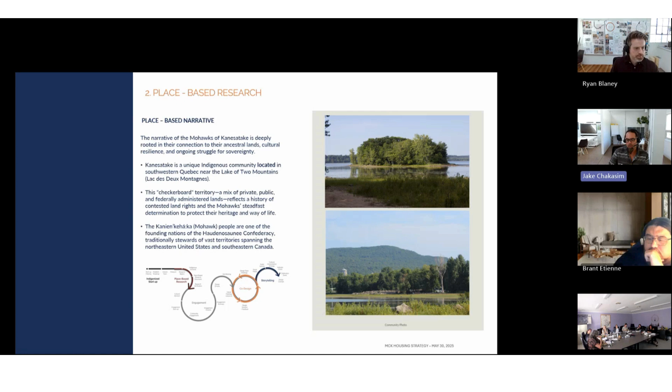So there's a lot of ingredients at play here that we want to consider and take our time with, and make sure that at the end of the day we present a project that is very meaningful to the community at the same time.

One of the questions that came up earlier on is how are we going to represent this project based on a Haudenosaunee longhouse? These are things we're going to be looking at - passive strategies, considerate of the role that wood plays and helps. Wood tends to offer a lot of health and well-being benefits to community, just the sensory environment that wood offers.

So we're really very much aware of the interior finishes, what this building might look like or feel like, whether or not there's a lot of stone, what's the role of stone in terms of foundations. We know it's part of our ceremonial aspect when we do sweats, etc. But it'll be interesting to hear more about how we can actually play with the material palette of the home.

So we're really considering everything from knowledge, wood, practices, ceremony, the notion of a greenhouse. Haudenosaunee is very much an agricultural community culture. So we have a lot of things to pull at the same time.

So we're really taking our time in terms of sifting through the information. Again, traditional practices, we understand the Three Sisters, very artisan-based culture, hunting, fishing, medicinal plants, shifting knowledge, the whole notion of indigenous knowledge and how that is transforming because of climate change. Again, going all the way back to your first document in terms of how you think of climate resiliency.

So the housing response is going to try to take as many factors as we can and try to build on some of the cultural foundations already in place, and then move forward from there, and hopefully come away with maybe a couple of different concepts that are really going to resonate with the housing committee and the community as we move forward.

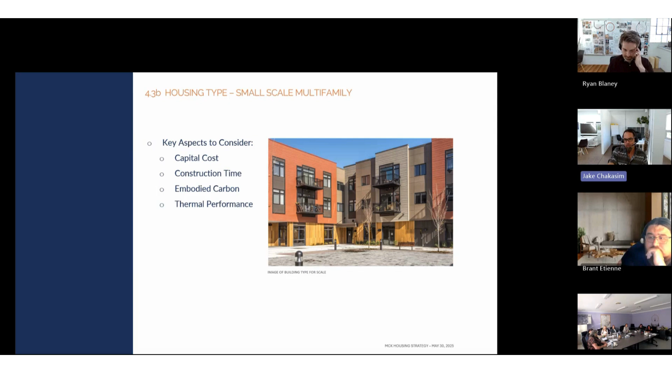Then you have your traditional small-scale multifamily platform housing, 2 to 3 stories. Again, very standard construction, traditional platform, wood materials to choose at, plenty of materials, plenty of opportunity to replace windows, doors, building envelope, facade treatment, HVAC system, etc. So this stuff kind of gives you a sense of adaptability and to make modifications as you move throughout the life cycle of the facility.

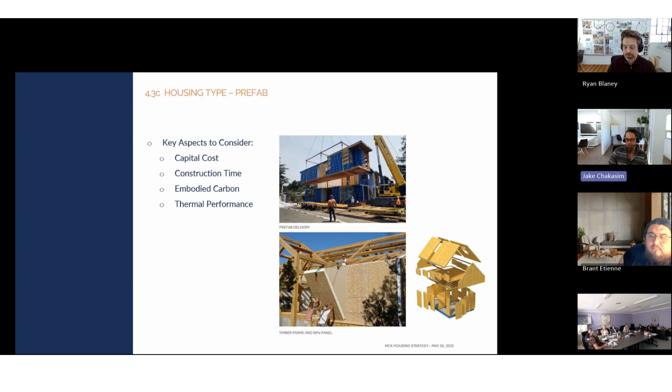Another one that we looked at last week, we shared with the community, was an idea of a prefab house. Again, this would be another type of hybrid construction. For most of us who do know a bit about prefab construction, it's made in a facility, or if it's SIP panel, a lot of the stuff comes down to quality assurance, tight envelope conditions built in a factory where the conditions are good, the working conditions are good. You got a very skilled labor force already at play, so there are not a lot of mistakes in the process. A lot of it is just site preparation, ensuring that you have the right foundation in place, and then you drag and drop, right? And so there's many plentiful benefits to this type of construction.

Another one was hempcrete that we looked at. Again, this is going to be another hybrid construction, in terms of what it offers. It is somewhere along the lines of rammed earth in terms of its environmental performance and the light footprint that it offers, the embodied energy that goes into it, the recyclable energy, the efficiency. There's not a lot of toxic materials that come out of this. It could last for 100 years, but there is going to be maintenance and upkeep. You still have to go out and maintain the building envelope in some form, whether it's plaster or whether it has sheetrock over top of it, whether it has plywood and has vinyl siding over top of it. It's more so the performance value of the building itself, right? But it does offer an idea that you are working with a natural environment and you're trying to look at an alternative building method at the same time.

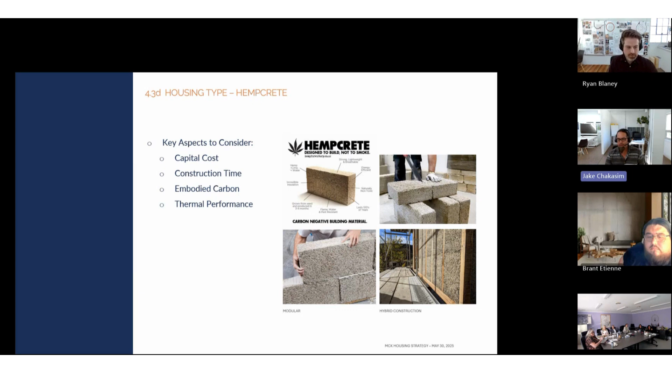In consideration of what the community is looking at, we did listen. We are aware about affordability. That's going to be a process I believe the community is going to have to determine in terms of who's going to move into the residence, and what kind of structure you're going to have set up for the community to move forward. I think we're all in agreement in terms of the durability and maintenance. We want to deliver the best bang for your buck, in terms of what's out there. And based on what you see in front of us right now, you can say each one of these methods are tried and true. They are both beneficial, but each of them have different pros and cons, right? So we're going to share a bit of that afterwards too. And again, coming down to quality control and delivery time, I think that's very important. Whether it's a pilot project or whether it's a prefab construction, which is, you already have a very skilled workforce in place.

The pilot project, I get it. You want to build capacity for the community. You want to work towards Red Seal. You want to build a new skill set in the community. But then you ask yourself, how far can that skill set reach into something, whether it's a new technology like CLT or whether it's basic traditional platform housing, right?

It seems to be a proven method to go with. I think every community across the country is still building traditional platform construction, just because of the efficiency and the simplicity of it.

And obviously with capacity building, we're considering and listening to what the community has to say about skill development. But at the same time, we're hoping the community will think about leveraging local and community resources. So what's at play? What kind of prefab opportunities are within your community, within say a 100-mile radius? That's really going to bring home the capital cost of your project to get it off the ground. So there's a lot of things we have to consider.

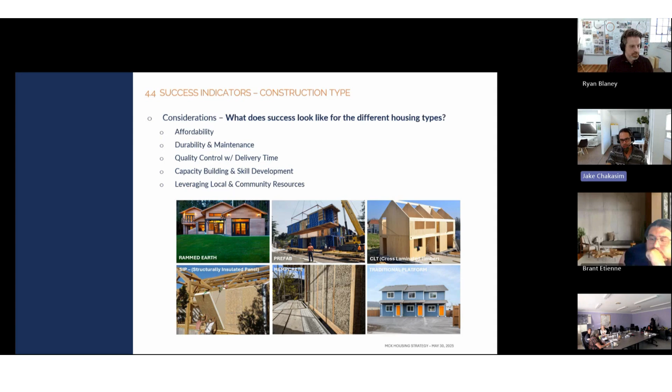And again, it's going to come down to the typology and the construction methods, and those 4 aspects that we want to look at as building criteria, performance values that go into a facility. That's going to be really important.

So part of our process right now, in terms of looking at the 6 different forms, we've done some preliminary research in terms of capital cost, from low to high, and some notes that come with each one of these different types of platforms.

I'm hoping the housing committee will step back and take a look at the 6 different options you have in front of you, and you weigh the pros and cons of each one of these types that you might want to look at.

When you think about the upfront capital costs, we'll break this down as we move forward through the feasibility study. But what we can say right now, based on preliminary research, is that traditional platform housing is the lowest capital cost level. It's the most common and cost-effective building method right now. The mature labor market and supply chain is there, and it's highly optimized for speed and budget. So you see the low capital cost.

Number 2 is prefab housing, which is low to moderate. Savings come from factory-built efficiency, quality control, and low labor cost because you've already got a skilled labor force in play. You get quick assembly, and upfront design expenses are already taken care of. So with prefab housing, site preparation and positioning is another thing to consider.

Then you've got structurally insulated panels, which is a hybrid system. I'd say even prefab is a type of hybrid system too, when you think about the foundation you might have to design for. SIP panels are more moderate, a bit more expensive, but fast assembly — that's what's really nice about them. They reduce labor cost and improve thermal performance. That's what SIP panels are all about — the performance value of the building envelope.

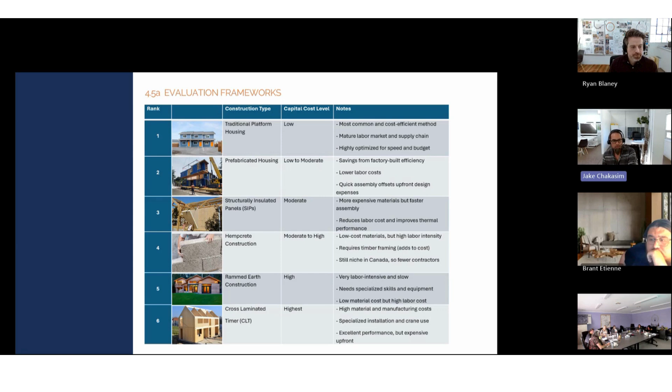So these are the capital cost breakdowns of the six typologies you're looking at. It's something to consider as you move forward with the evaluation process in terms of where the community wants to go. Once we complete our feasibility study, we'll have more information to round out this conversation. I wanted to give you an evaluation framework this evening in terms of what our research has concluded, and where each type of construction stands in relation to each other: capital cost, construction time, embodied carbon, and thermal performance.

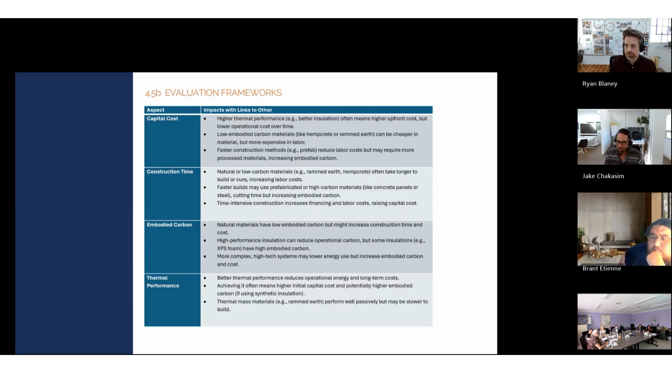So finally, Jake, can I ask you a question? Did you consider the cost of transport, for example, for prefabricated housing, in the cost? At this point, no, these are just some of the high points we're looking at. It depends—if you were to pick a prefab within, say, 100 miles of Montreal, we would research the prefabricated facilities within your region. It's one thing to buy in Ontario versus Quebec or even New Brunswick. These are things that will come into play as we continue the feasibility study, and we'll hopefully approximate this based on the final design outcome, whether it's a 1, 2, or 3 bedroom facility. So these are costs that will come into play as we move forward.

So that was the evaluation framework, really pushing forward the aspects of capital cost and thermal performance. Capital cost level—again, this is the ranking in terms of what's going on. I wanted to reinforce some of the stuff that goes in there. This is pretty much the previous slide I went through earlier, showing low to moderate capital cost levels.

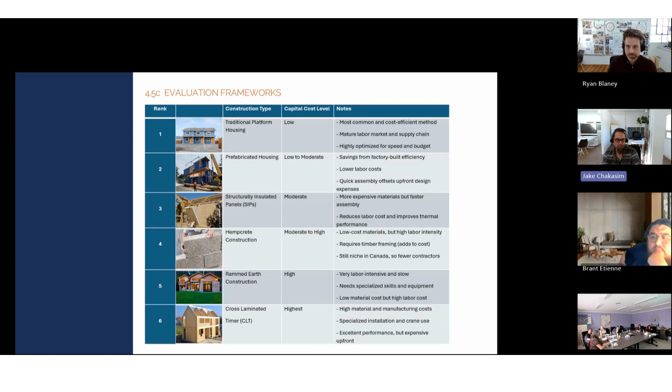Can I ask about the prefab? If we do prefabricated, can we not do that in the community? I know we don't have the place right now, but let's say we have our school or shop here—if we ever get that building, can we not bring that here instead of looking in Ontario? Isn't that your plan anyway?

In order to create or build a manufacturer that prefabricates, you're talking about a lot of machinery, and it's very expensive, because these things come in sections as they're built. Yeah, I know how it works—we just assemble it.

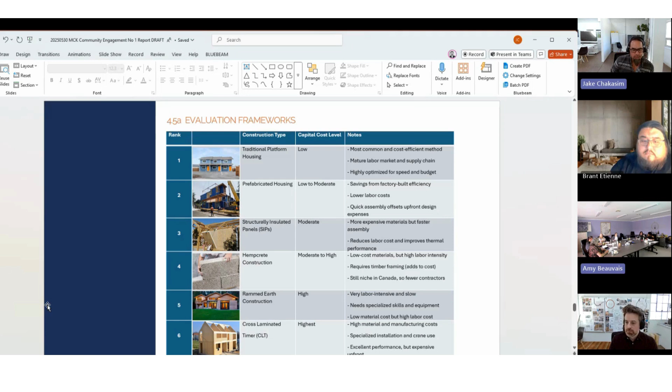That's it—yeah, so again, we're just painting a picture tonight. We're showing you six different options, and for the most part, aside from number one, which is a standard method of construction, the other five are hybrid types of construction. So they will require some aspect of built foundation design. It depends on what the community wants to do—if you're looking for quality assurance and a good product, prefab seems very favorable these days. But if you're trying to build skill, which is very basic in the community, and you're working towards red seal certification, obviously you'd go with your traditional platform.

Ryan, is there anything you'd want to contribute, just for understanding? I think Corinne raised some good points about location and shipping, and these are just, as Jake said, a high-level look at general approaches to these construction types. As we go forward in the feasibility study and gather more information, we'll be able to hone in a little tighter on what capital costs look like, or other considerations from the community that may start to rank these systems in a different order.

The ranking you see here is just a quick environmental scan in terms of how the industry looks at these typologies. CLT has been around for a number of years now, and platform housing has been around forever. Everything else in between has come in within the last 25, 30 years.

So we're looking at all the options, but also really trying to make sure that the product you guys are looking for is of high performance value. It's got a good investment return, it's quality construction, and it doesn't require a lot of repair, operation and maintenance. At least if repairs have to be done, they are within the reach of the community and the skill set of the community.

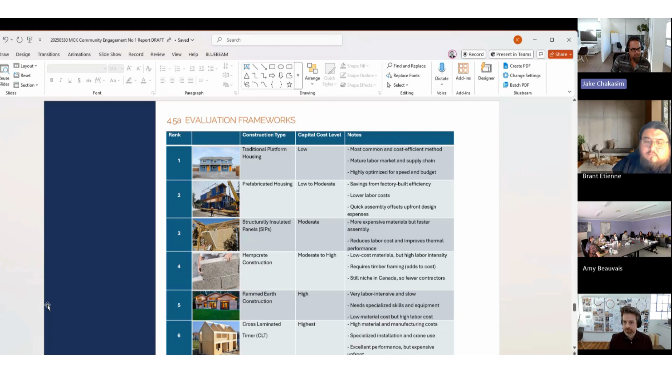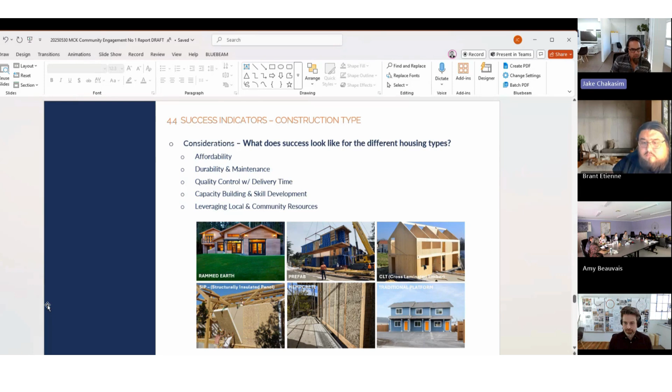So I think these are things we have to consider as you move forward, and to really come at it with those high-end values in terms of capital cost, construction time, embodied carbon, and thermal performance, and make sure that everything aligns with some of the efforts of the community in terms of their stewardship values, the land codes you guys are pushing forward, some of the cultural values they want to maintain, all the stuff that comes into play.

So we've looked at all the information you have so far, and as we continue to write the feasibility study, we're going to go through the consultation you did the other day, Corinne. We want to go through that some more and listen to what the community had to say. But at the same time, we also want to have our survey on our end.

And so, like I said earlier on, the survey that we put together deals with the social, cultural, the environmental, the economical, and the technical aspects of housing. So we broke it down into 5.

So what I want to do now is open the survey so we can all take a look at it. I believe Ryan's going to put the survey link in the chat box for you guys to look at. The way I set it up here is that we can share this information with you later on, Corinne and Amy, and you can put this on your community bulletin and give it to the community.

So I'm going to hit preview right now. And so when the community logs into the survey, it gives you a brief idea of what the feasibility study is about. You're invited to participate in this questionnaire as part of a housing feasibility study aimed at using different construction methods in your community. So once you start it, you do have the option, when you hit the link or the QR code, to do it on your computer or on your mobile phone, one or the other.

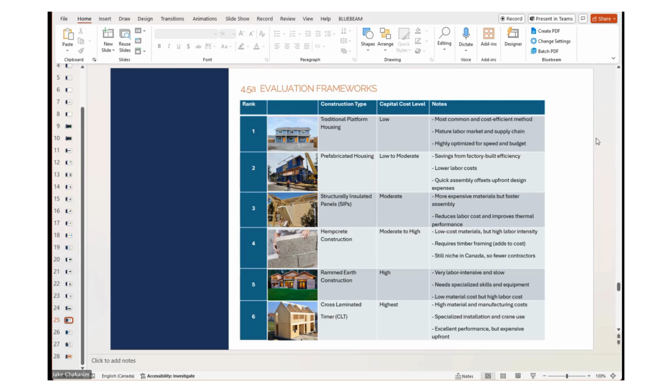Okay, so I'm going to go through the recording again a second time, listen to all the conversation, take note of what you've shared this evening. If there's any further questions, I think it's important just to make sure that the feasibility study is not just about the selection of one type of building, but it's going to support the community in many other facets, from capacity development to their land code and any other investment that you guys are looking forward to, right?

I could tell you right now, the feasibility is coming along nicely. We've got a lot of good hard information, and we're just looking forward to diving into it for the next couple of weeks and really fleshing out some of your needs at the same time.

Is there any further questions? Do you want to talk about tonight's presentation a bit more? If there's something that needs further clarification? I think we've covered it all. I just have a question in terms of timeline. What is the timeline, what does the timeline look like? I want to see if it's possible, or am I being realistic in pushing to try to start the first triplex this year? Ryan?

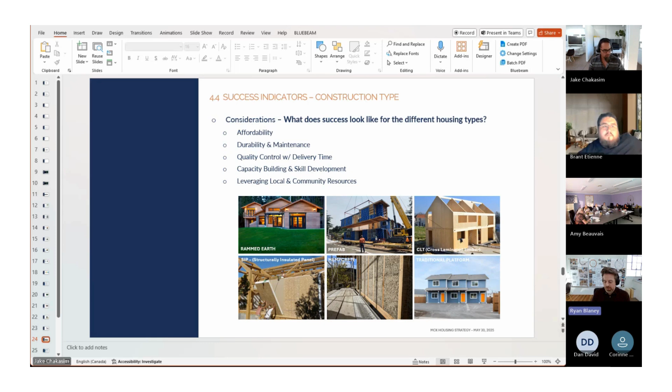We've chatted before about our team expediting where we can or finding ways to overlap, and we've already started doing that with prepping the feasibility study in advance of the workshop here, and we're going to do the same with design as we get information from the feasibility study and community feedback. So we're just going to try to advance each of those phases a little bit as we can.

But some of that will come down to the cost estimate, the results of the feasibility. So in terms of our ability to help move things along, we'll do everything we can to expedite the schedule, but there will be some sign-off pieces in there and some decision making on whether one approach is the best one for the community. So yeah, that's not really an answer. That's more just saying we're here to work with you to make it go as fast as possible, but still be true to the process of making sure that the final product is what the community wants and needs.

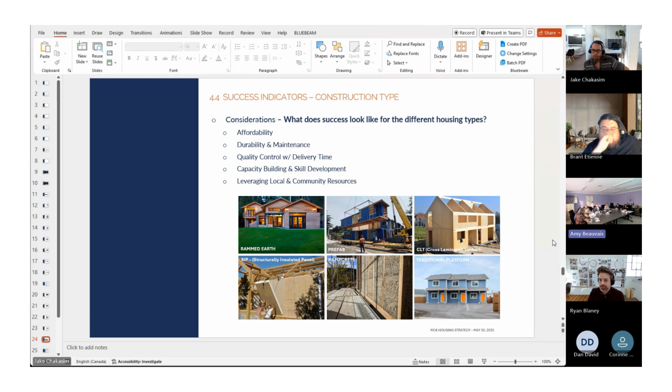I'm wondering, so we do have money. Can we start building these as a kind of physical part of the feasibility to see exactly how much it costs too? So there can be the feasibility costs and then the actual by the end of this year. I think we need to sit with ISC and propose that and see what they say.

We have money. Are we obligated to pick just one way? No, that's what we're doing, we're not picking one, but we're gonna do one anyhow, because we want to train. Yes, we want to train.

But we may then, let's say we do the feasibility study and it shows that the timber frame is really much more effective or advantageous for the community in terms of cost and everything. Let's say that after doing a class C cost analysis, a life cycle cost analysis which will include insurance and energy efficiency and all that, to get a cost over time, and let's say the timber frame shows it's gonna be the best choice, for example, even though we're just going ahead and building the rammed earth now.

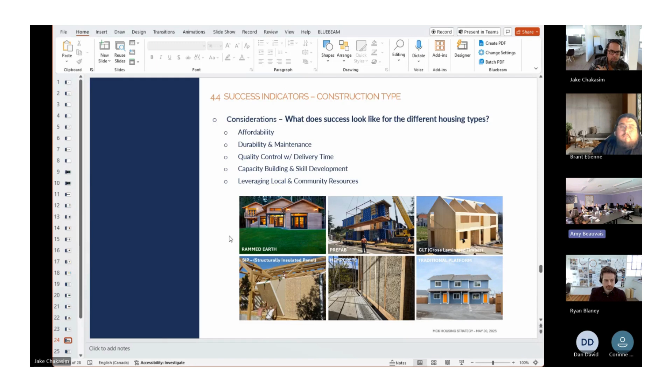We got a whole file cabinet full, don't we, Cheryl? Actually, we have a database full of it. Well, see, this is what I mean, regarding all of that we've already got that information. It's just a step now, like Corinne says, we got the numbers, we got what we need. Let's get it in there and do what we got to do next to get this going, get this feasibility study done so that we can, like you said, give that comparison that they want.

I think what we wanted to do tonight was, it sounds like you have all the numbers, the rationale, the direction the community might want to go, but we wanted to give you the hard science numbers in terms of the typologies you're going to be looking at and the performance value of each.

Of the 6 different types, and what's going to give you the best return in terms of not only value but also skill development. We do know that after the election, Canada is going to start moving towards prefab housing. There's a big investment pushing that way right across Canada, so you've got to look at the optics in terms of what's going on across the country and where investments are going.

If you're looking to do a pilot project—and I can say, working with other nations for the last 20 years, every nation across the country has been trying to do a pilot project, looking for the poster child. And poster childs come and go. I'm sorry to say, but housing need is always there.